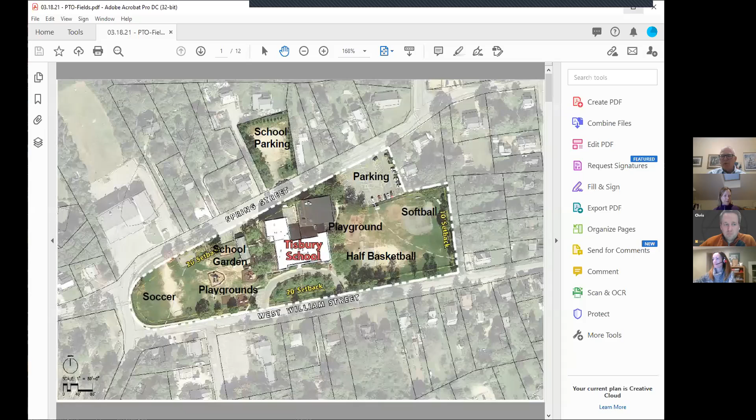Cheryl, one of the important components of this would probably be complete streets as well. And that can be a little bit of a discussion later, but we'll let Chris roll. Okay.

Okay, so I trust that everybody can hear me and also see this site plan. Yep, got a thumbs up. Okay, good. I'm going to close my viewer of people so I can't see you all. So if there's something happening, I will not know unless you speak up and tell me.

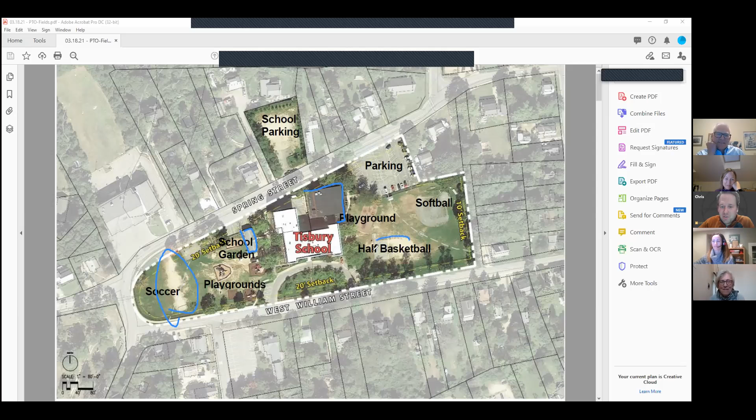All right, so this is the existing site as you may know it today, sitting up on the hill there. You can see where the school is now, the little White House over here, and the existing gym here, and then the white roof is the big 1920s building. But key to note out of this image is, when you talk about site design, this image really kind of tells you a lot. It tells you that this field is well used because it's worn right now. And it tells you the basketball may be playing on some dirt as well, and I know that's half court, but there's a lot happening over here.

And then you can gain a lot, so we know, and then if you go dig into it a little deeper, you know that some of these elements are a little more well used and tired, as we like to say, than others. And that's some of this play area here. And then some of the other things are newer, but still sort of aging, if you will. And so those are the conditions that we find ourselves entering into with this site design.

A couple of other things to note is you have parking here, and then on the site currently, you have a little bit of head-in parking and bus pull-off on the northern side of the site as well. So those are some of the key components that we find today.

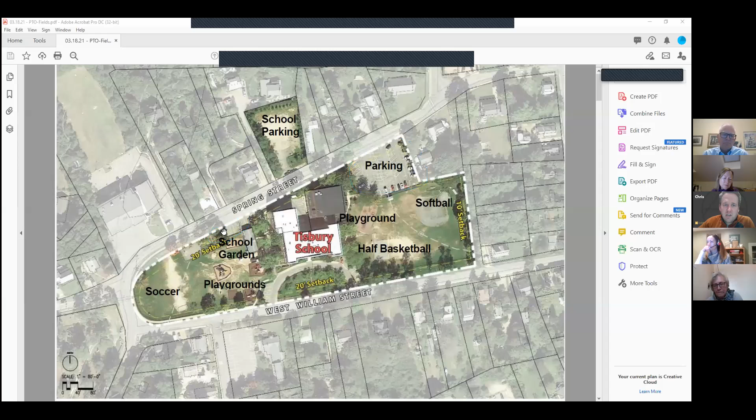And what we really wanted to talk through today was what the site plan is for the new school. I'll start with the site plan and then kind of back into some other things to talk through it a little bit more in detail.

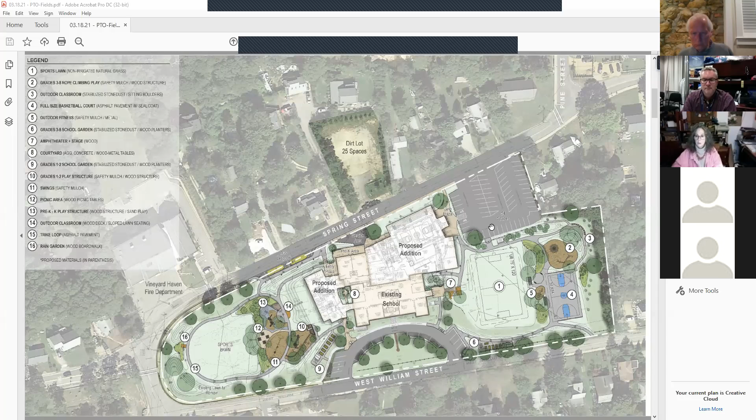We're taking advantage of some of that topography, making elements like amphitheaters as we develop the site plan, maintaining the parking over here. One of the key components to the design is that the entry for the new gym is at the same level as this parking area, so it has grade level entry. You don't have to go up 10 or 12 steps just to get to a landing, then go up more steps to get into the gym.

Down here you see a number 6, and we wanted to make sure we incorporated school gardens and planting for sustainability, and also just the vibe of teaching growing on the island is something we wanted to maintain. The existing loop there now would be maintained, probably repaved, and maybe clean up some of the plantings in front of the building.

On the west side of the site we have another school garden for the lower grades, K through 1 to 2, and we have the rest of the play structures. So we have some swings over here and another play structure for the 1 to 2 grade age range, and then some picnic areas.

One of the things we tried to do as well is get some nice shade trees around some of the seating areas, but also around the play. I have young kids, and it's really hard sometimes when you go to a playground and it's just in the baking sun. So we tried to get plantings around these play areas so there is some shade and play all in the same areas.

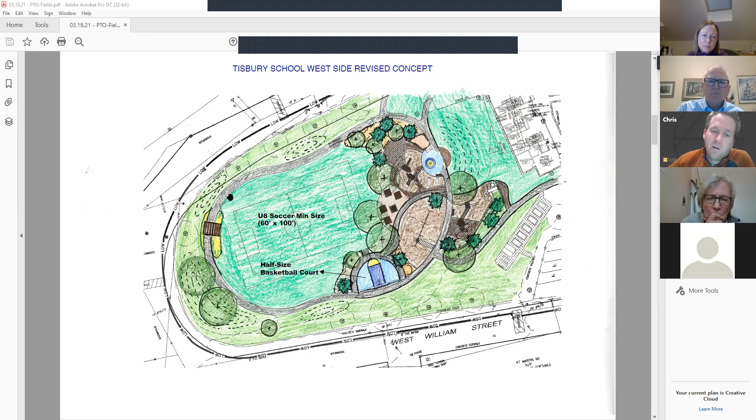And then they reimagined sort of the amphitheater over here outside the building. So that was really the big push for site design. This is the current design, although it's not in the rendering, they didn't re-render the whole thing. They are thinking in this realm for that west end of the building.

So here's an image of the site to talk through how the building sits. You can see the 1929 building, which is the original building on the site, and then the '93 addition. This red box shows you where the gym is currently.

Aside from plugging the courtyard—or the blacktop between the two buildings and parking area—the new building doesn't stick out terribly far from the existing gym. You can see the stairs right there, the bottom of the stairs that go into the gym underneath. So it's not a massive, obtrusive building on the site. It is bigger, but we've tried really hard to break the scale down and make it a building that fits the site it's in.

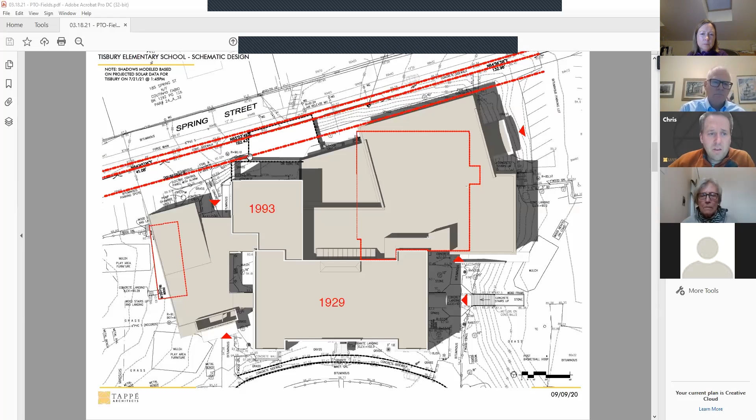With that, I'll go back to this site plan and see if there are any big questions or comments or discussion we want to have about that. If we have time after, we can talk through more of the inside of the building if needed. But this is a good point to pause and see if there are any questions.

I'd like to take a moment to reinforce one of the objectives of the school building committee, which was to come up with a design that did not take away real estate from our play areas. When Chris had that overview showing the dates of the buildings, if you noted where the White House is, on the lower part of the screen, there's one little play structure that became impacted. Other than that, we did not take away functional space.

And I think through the creativity of the team, it's actually been augmented by using the grade changes we discussed to introduce small amphitheater sitting spaces and gathering spaces that didn't exist before. That goes back to the work of the committee in conjunction with the design team. I'll turn it back for questions.

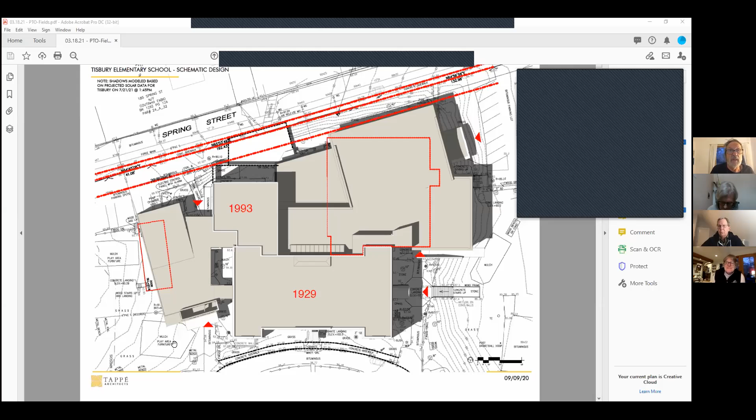Well, I would say I like the site plan a lot, and it's been a long time we've been looking at different variations. This one—I came to learn a while back that splitting the two playgrounds for big kids and little kids is actually an advantage, and it seems to work out this way in this configuration. So that looks very nice, and it's quite an improvement from stuff that I used to see in the back.

I wanted to ask a question—not for tonight exactly, but on another day we've been looking at that space behind the emergency services building. The question is whether that territory, which is a drainage field, might yet be used for recreational spaces, either pickleball, basketball, or even a half-size soccer court, while maintaining the drainage field. It's not very big, but it's right there, and the facility has surplus parking more than the fire department needs. So it's something to think about. I know it's not part of your project directly, but if you have a spillover or extra need, that might be something you all would like to think about, and we might take a closer look at that to see if it's practical.

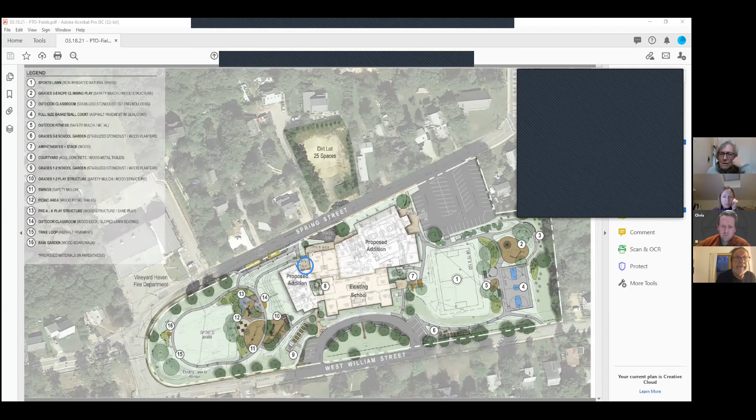So at the points where you'd come out of the school into each of the recreation areas, let me try to draw that real quick. There's an exit there, there's an exit here. You can still use this center exit, but I doubt it's actually going to get used that much. There's one there, one there, one there.

I think those are the most viable, but if you're coming from lunch, the 3rd through 8th grade would come this way. If you're coming from lunch and you're the younger kids, you would come that way. This is almost flat. You can see the distance between the topography there.

Right, and then what I'm seeing is the amphitheater topography coming down. Right on this side, by 14. So the closer together they get, the steeper it is. And so the pathway, we spread it out so that it's nice and gentle. Then to create the amphitheater, you bend them back closer to each other so that they create a little bit of a bowl to sit in, like a lawn amphitheater type stuff.

So the other question I have is, I'm curious about the spacing of all of it. I think with the play equipment, you've got specific play equipment in each of these areas. You've got swings, and then you've got some climbing for the older kids as well.

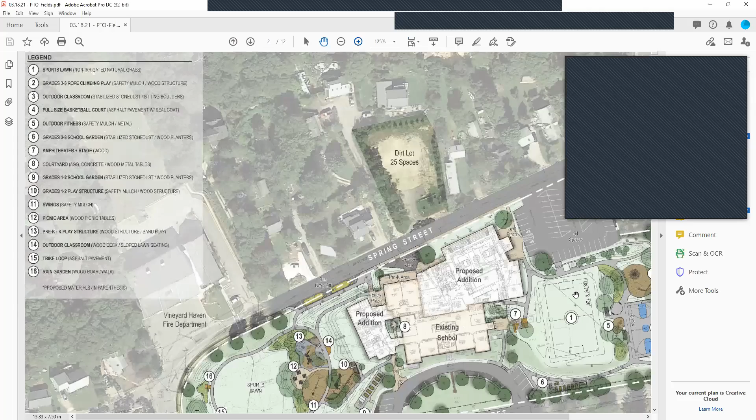Take a look. Oh, they have a fence, it looks like they have a little backstop fence on the two ends of the basketball court. Okay. And then there's plantings and stuff like that.

And then the other outdoor education area is just beyond the play equipment. Yep, another outdoor learning center. This one's probably more flat. The character of that, in my conversations with them, has been like maybe stumps on the ground, the stone path, and then there might be an outdoor board, like something to ride on, to create an outdoor learning area.

So have you done this? There's one closer to the building as well over here. Have I done what? I like the planting there, the use of the landform there. Do all of these outdoor education areas have trees and plantings so there's a little bit of shade when kids are out there if it's really exposed?

Yeah, we try to couple outdoor classrooms or learning environments with shade as much as possible, either from a building or from landscape, just because it doesn't really work if you set kids in the sun while they learn. So early on it's going to take a couple years to get these mature enough to do what they're meant to do, but the idea is that they'll grow up nice and tall to create shade for the students.

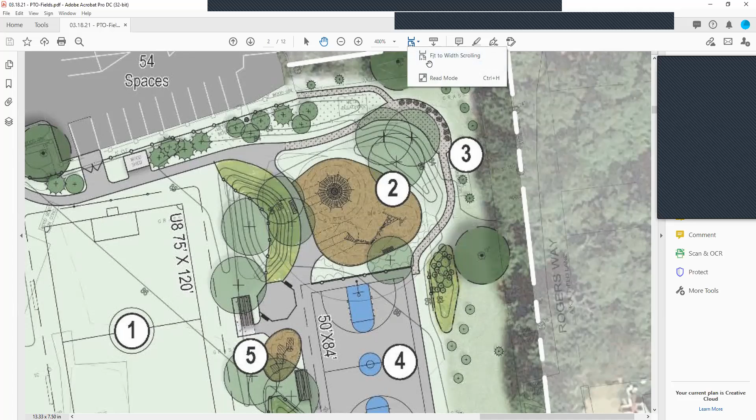Will, come on. I was just wondering if Chris, maybe you could speak to, obviously as a parent, I think the spaces look amazing for kids to play on, but I'm interested in the community, like the entrance to the gym, and how that would fit its community space, and what you envision, like the amphitheater, do you have a sense of how separated these things might be from the school and more available for the community to use as well, in addition to the school?

I'm trying to figure out, on the weekends I assume stuff could be used by the community, but is there spaces that could be community spaces in a different way? Did you, as you looked at this, see any of that? Right now they're all very integrated with the school, but you had talked before about maybe having some separate space so you could open something without opening the whole school up. Is that part of community space inside the school?

Well, and outside too. I mean, I guess because we're really focused on the outside. The community can use that anytime they want, though during the school day the school use would take priority over any part of the site. But that's a scheduling or program thing the town would have to talk through with the district, about when the community uses this versus not. That's my experience typically with outdoor spaces. If students aren't on break or recess and someone wants to play basketball or walk, I don't see that being a huge issue, but without some level of coordination you won't have someone set up an outdoor community event like in this amphitheater without talking to the administration. So the community space you can open without getting into the rest of the school is here, around where the upper grade levels are.

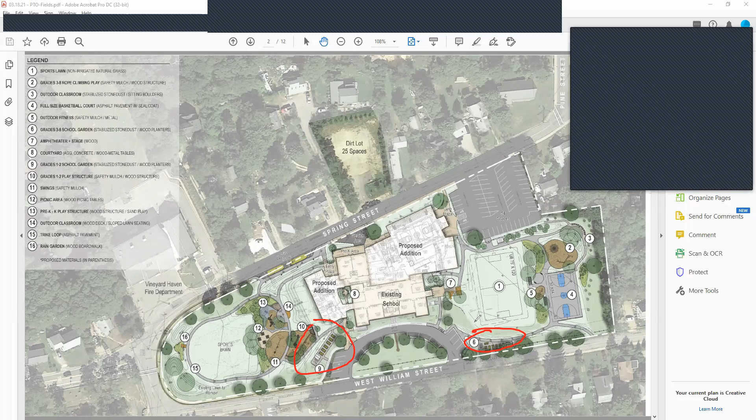I don't really know, let me go back one slide here. So the existing ones are along Spring Street where it says school garden, right here. It's labeled school garden, that little area there. Yeah, so those two combined would be larger than that, for sure.

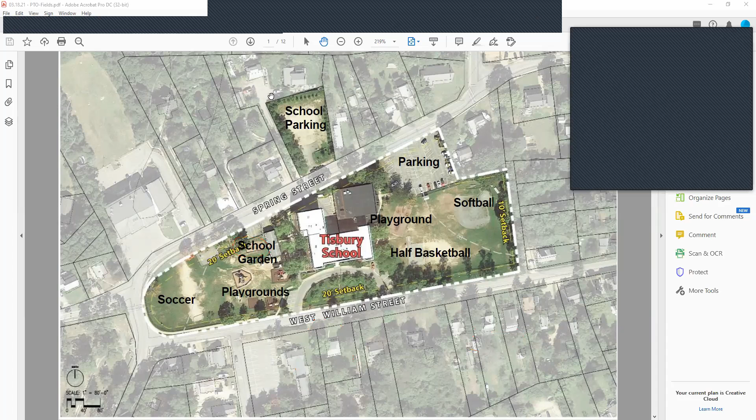The other question is around the rain garden - is that to collect water coming off of that path, or how has that been designed? It's not water from the path specifically, although water from the path would go there. What's happening is the entire site comes down to this point, and the design is for a subtle sheet flow of water. You can see the topography lines getting lower as they come into this corner. If you go out there on a good rain, you might find this is a big puddle or very wet, and it takes a while to disperse.

The thinking here is to use what happens naturally and just redirect it a bit so that it captures into a rain garden. We're trying to get a subtle pitch on this lawn so it's persuaded to come down to a low spot in the site where 16 is. Then your puddle or pond after a big rain event is collected there instead of in your field where the grass is, which would otherwise die and leave dirt. That's the idea behind it. It needs more engineering, obviously, which happens during DD to make sure that works, but it's for that whole end of the site to pull that way and collect.

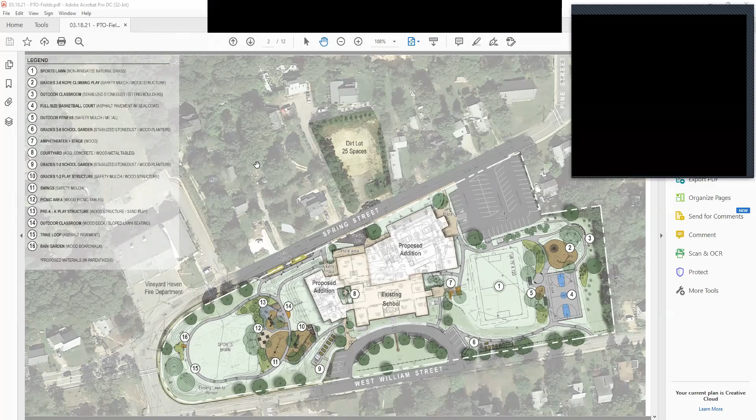So, that being said, we're off to the races here. We started, this is where we left off, and this is the sort of, Harold calls it, the 30,000 foot view of the site with the different components, so you should know the way that it sits on the site. And diving into it a little bit deeper, the lower level, which is the gym, or what we kind of touched on earlier with Anna, is the sort of more public area. This is where we're calling the gym and things like that.

So that's good for spectators and families to come and see any kind of games in the building. And then changing rooms, and enough toilet facilities for the large events like town meeting and basketball games. And this entire level of the building is designed in a way that can be cordoned off, so we can control access to the rest of the building.

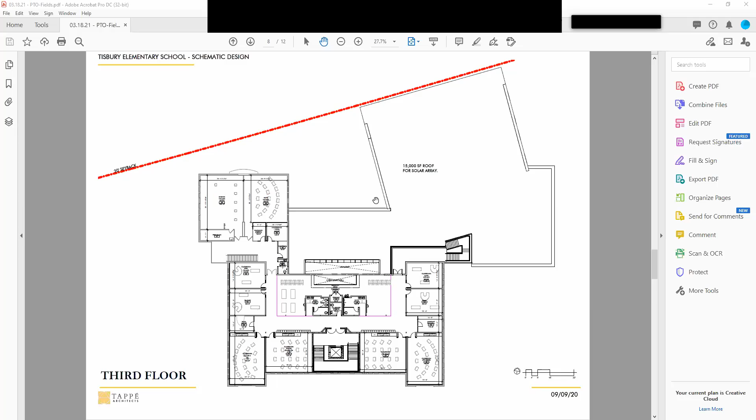But just from a massing perspective, you get a sense of what we're looking at here with the 1929 building being really the centerpiece of this whole project. We're trying to set that up in that way.

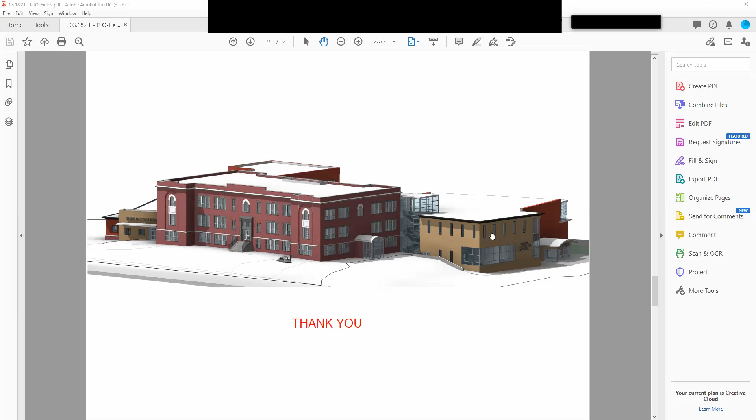On the southwest side, you can see this admin block here. Don't worry, we're going to work on this form and shape and try to massage it a little bit so that it works better for the community when we get into design development.

The Spring Street side from the north looks like this. Down here is that outdoor space I was talking about for the kindergartners. You can see some clerestories for the upper part of the cafeteria, the deliveries for the kitchen, and the gym over here on the left.

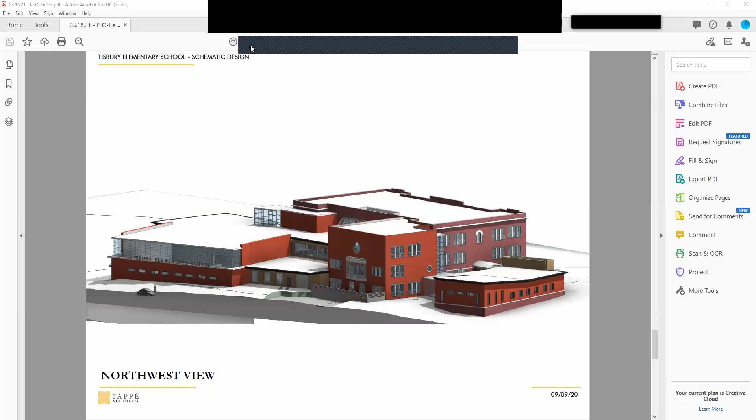And then we have the last rendering here, which is the gym entry and the community side of the building, coming in from the parking lot.

So those are those, and I will share some other images here. This is an image of the gym.

You can see that window wall to the left there, Spring Street off to the left, and maybe what the court looks like with the stage in the background. We usually do one full court going the long way and then two side courts, so you can have at least two teaching stations going at the same time, which gives you a lot of flexibility and freedom there.

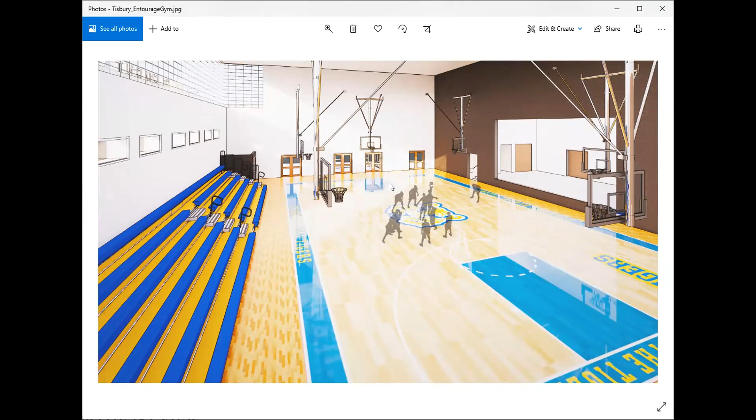The other image I was going to show you is the middle — these are the media center areas in the middle of the building. There might be a couple classrooms off to the left here, and then the media area and breakout areas in the middle of the building that are kind of open.

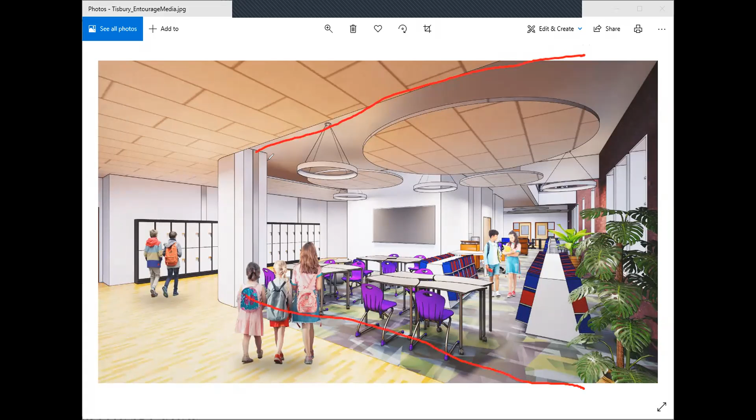During one of the last meetings with the building committee, we added in some operable walls in here, so that if this area needed to be closed off for quiet or something like that, you would actually be able to close it in and have a more closed space, but it can be opened up and left in the configuration you see it in right now.

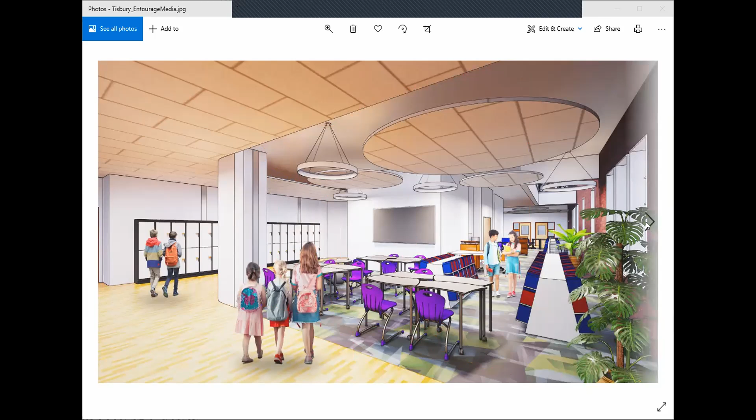And then this is that image of the cafeteria with the connector on the 2nd floor and the sort of daylighting that we expect will happen — this is real daylight modeled with orientations on the island.

So that's a nice image of the cafeteria as well, utilizing the historic brick on the building — probably clean it up a little bit, but emphasize that, and then create some nice clerestories and windows to keep a lot of daylight in there.

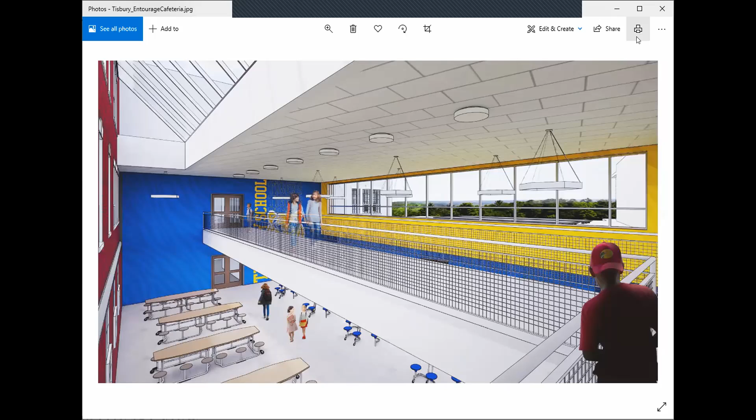So that is what I have — a lot going on. I don't know if I did it in 15 minutes or not, but hopefully it gave you a lot of info.

That was fabulous, Chris, thank you so much. I think I'm where I hoped we would be at this point in the project. I'm so excited for it. You guys have really knocked it out of the park. There's so many additional features in there. I'm just excited for all the potential.

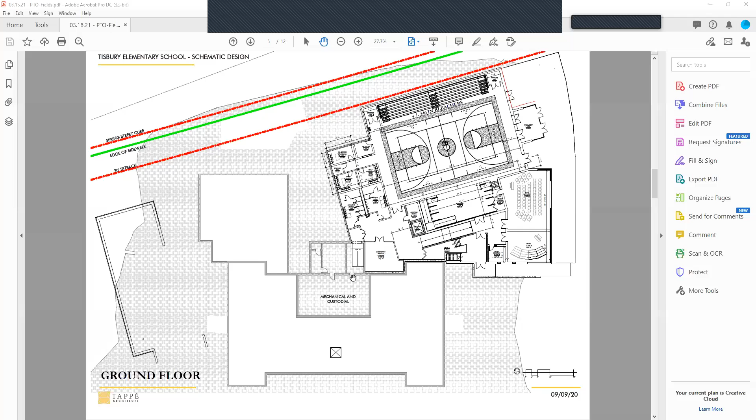Let me share my screen again here. So the main entry, yes, it's going to be useful. Be careful how I say this - it is useful and active, meaning what I've tried to do is get these stairs to work so that you're coming up from the 1st floor, and this landing is actually at the same level as the top of this stair from the outside. So one could go through that door and be at the landing of this floor, then go up a few steps to the 2nd floor, which is what happens actually today. If you go in that door, you go up a few more steps to get to the 2nd floor.

And so that could happen, but it's not an accessible entrance, so therefore we are not calling it an entrance. The main entry to the building is right there, and would be the secured entry during daytime hours. Although at arrival and dismissal, all of these doors would probably be functioning with kids coming out and coming in, and you might have a staff person at each one. But right at bell time, these are programmed doors, so they would just shut and be locked, and you wouldn't be able to get in anywhere except this main entry right here. Oh, that's good.

My 2 cents, no, like I said, it's important, Marie. All of these are taken into consideration and weighed up. I mean, that is truly how this plan has evolved. Maybe you could think about putting some kind of nice grill work up to the ceiling, I don't know, just to keep the safety. It just doesn't seem safe, but go ahead.

Thank you, Marie. Yeah, I hear you, Marie, and I appreciate you thinking that all through again. I think it can be a little subjective too, some people just feel those things more than others. And I would imagine when the staff was looking at this too, it would be a point for them to consider how they would manage that space on their day-to-day, and the kids flowing through it. If they feel that's something they can handle, I'd be interested to hear that.

Okay, Reed, you have your hand up there as well. Oh, did you say my name? Sorry. Yeah, Marie, that was - this bridge has been a sticking point for me as well.

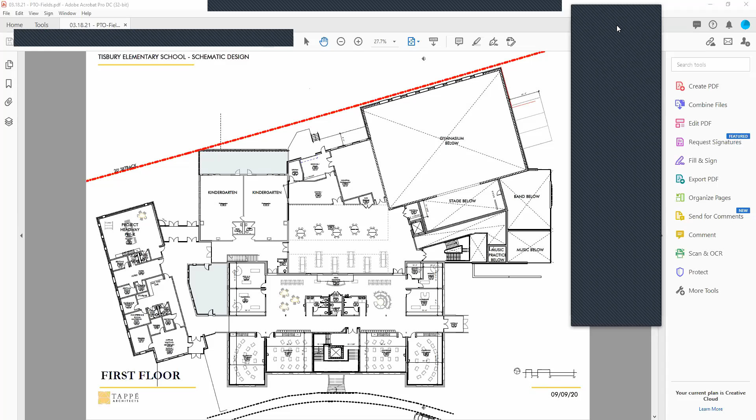And so I've come around because I think it serves a really good purpose. I was thinking along the same lines as you, where there's a bridge, so something's going to happen. But that situation, a stairwell or a balcony - I wonder, Chris, how many schools you've designed that have an element like this, where there's something open to another space below. It's interesting that a few people have brought up this concern of that bridge or that balcony. It really isn't that different of an element from an open railing or stairs or something. But I guess I'm just wondering how this has been received in past schools that you've done.

Yeah, it's worked very well. I mean, the thing is that I think there's always an example student - name the subject, there's going to be an example student who does something, and I think you can't necessarily design out that scenario. But my experience, being a designer, we carry that liability, and we try to make sure we don't open schools up for undue liability as much as we possibly can.